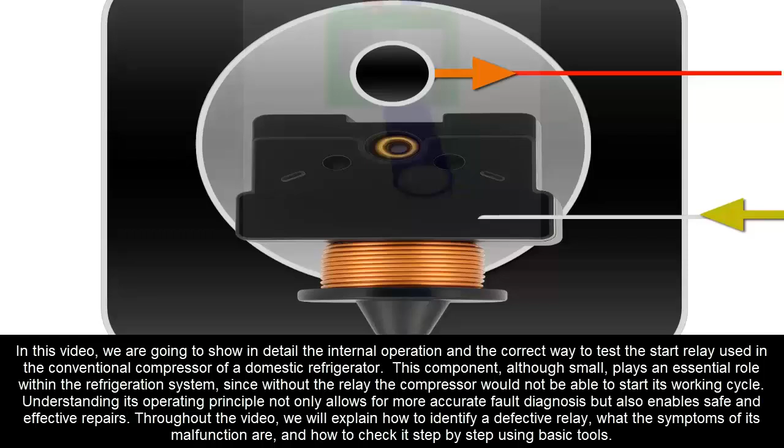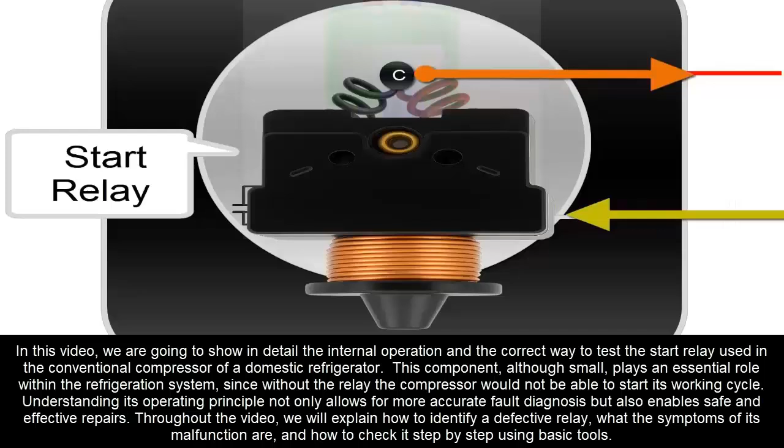In this video, we are going to show in detail the internal operation and the correct way to test the start relay used in the conventional compressor of a domestic refrigerator. This component, although small, plays an essential role within the refrigeration system, since without the relay, the compressor would not be able to start its working cycle.

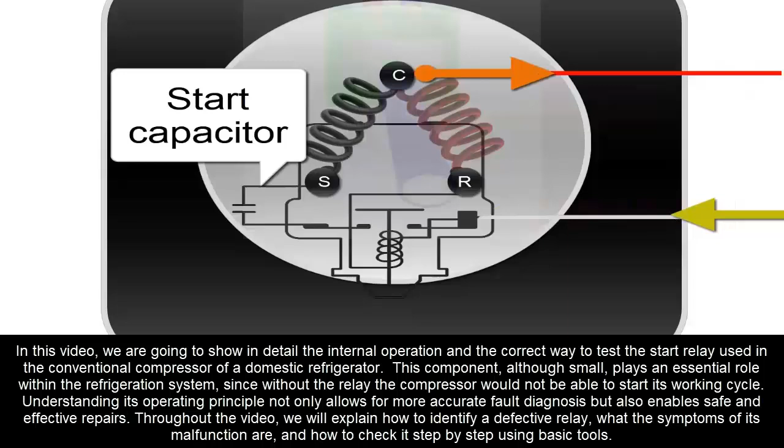Understanding its operating principle not only allows for more accurate fault diagnosis, but also enables safe and effective repairs. Throughout the video, we will explain how to identify a defective relay, what the symptoms of its malfunction are, and how to check it step by step using basic tools.

Function of the compressor relay. The compressor relay is a fundamental electrical component within the starting system. Its main task is to help the compressor motor start correctly by supplying the additional current needed during the first seconds of operation. Once the compressor has started, the relay automatically disconnects, leaving the circuit in normal operating conditions.

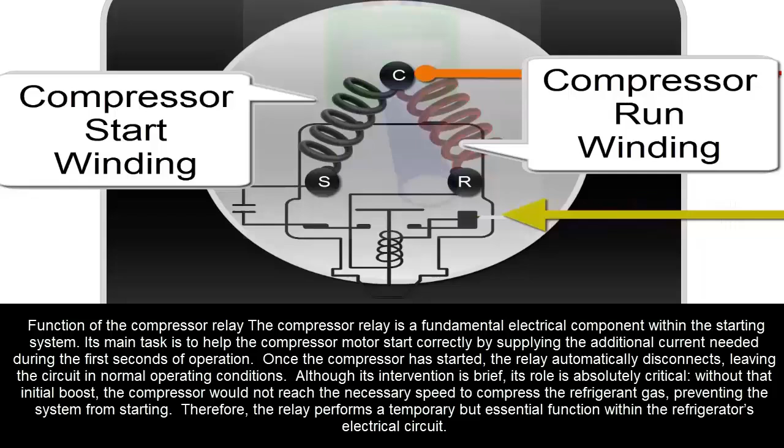Although its intervention is brief, its role is absolutely critical. Without that initial boost, the compressor would not reach the necessary speed to compress the refrigerant gas, preventing the system from starting. Therefore, the relay performs a temporary but essential function within the refrigerator's electrical circuit.

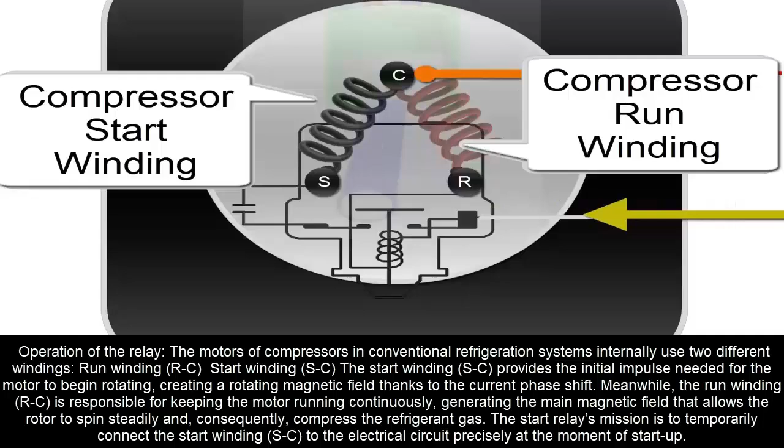Operation of the relay. The motors of compressors in conventional refrigeration systems internally use two different windings: run winding, RC, and start winding, SC. The start winding, SC, provides the initial impulse needed for the motor to begin rotating, creating a rotating magnetic field thanks to the current phase shift.

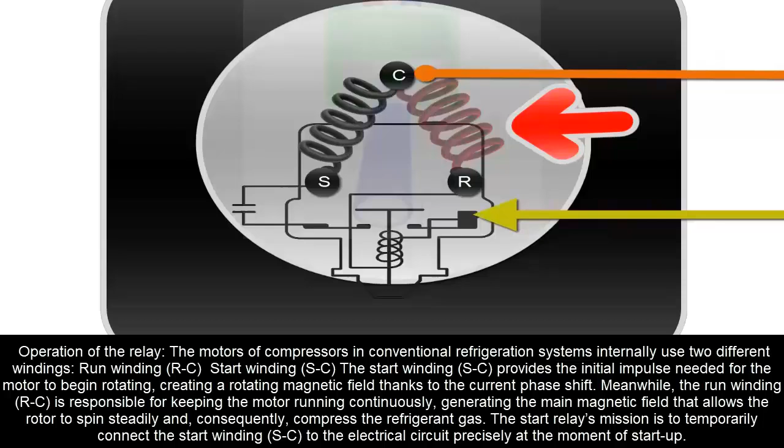Meanwhile, the run winding, RC, is responsible for keeping the motor running continuously, generating the main magnetic field that allows the rotor to spin steadily and consequently compress the refrigerant gas.

The start relay's mission is to temporarily connect the start winding SC to the electrical circuit precisely at the moment of startup. During this initial phase, the motor requires an additional surge of current to overcome the mechanical inertia of the rotor and the resistance of the refrigerant gas inside the system.

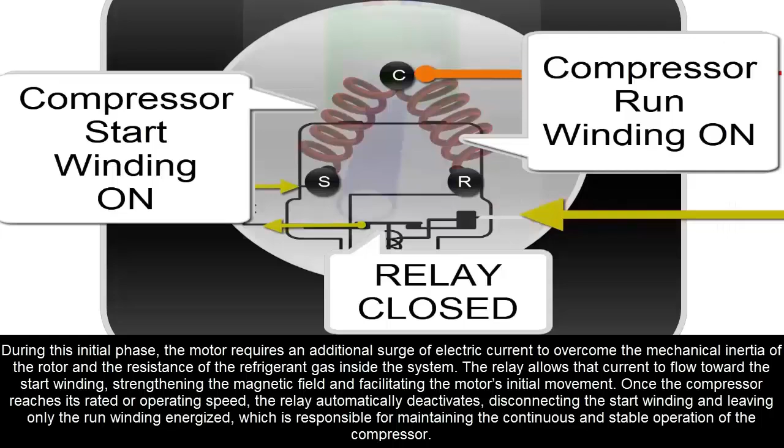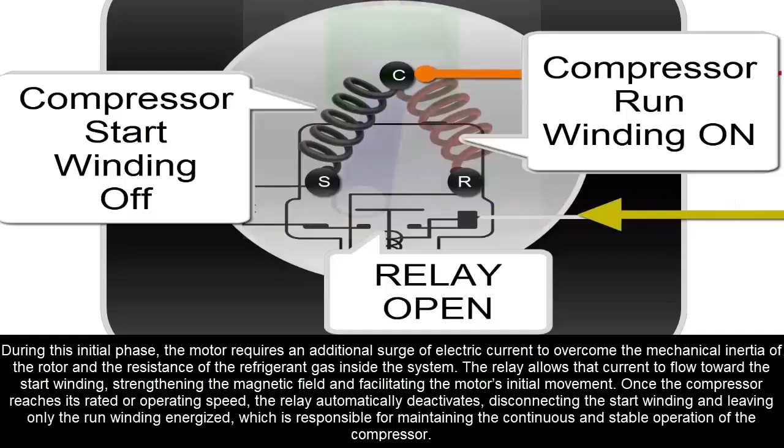The relay allows that current to flow toward the start winding, strengthening the magnetic field and facilitating the motor's initial movement. Once the compressor reaches its rated or operating speed, the relay automatically deactivates, disconnecting the start winding and leaving

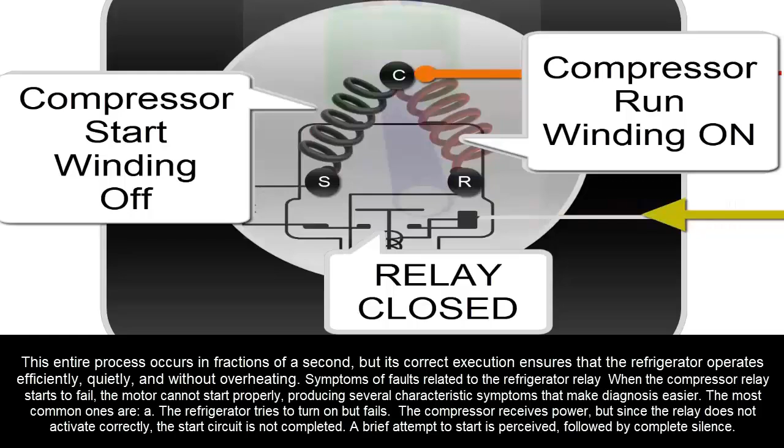only the run winding energized, which is responsible for maintaining the continuous and stable operation of the compressor. This entire process occurs in fractions of a second, but its correct execution ensures that the refrigerator operates efficiently, quietly, and without overheating. Symptoms of faults related to the refrigerator relay.

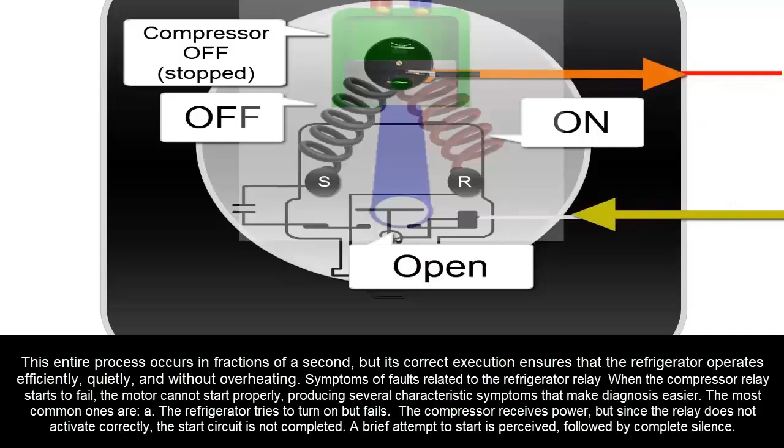When the compressor relay starts to fail, the motor cannot start properly, producing several characteristic symptoms that make diagnosis easier. The most common ones are: A. The refrigerator tries to turn on but fails. The compressor receives power, but since the relay does not activate correctly, the start circuit is not completed. A brief attempt to start is perceived, followed by complete silence.

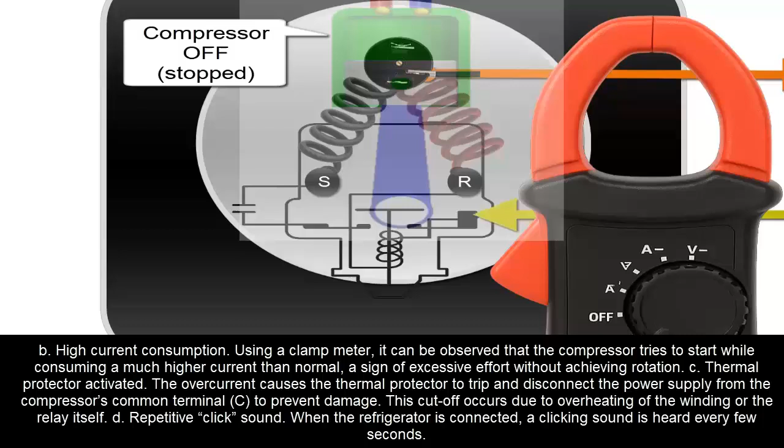B. High current consumption. Using a clamp meter, it can be observed that the compressor tries to start while consuming a much higher current than normal, a sign of excessive effort without achieving rotation.

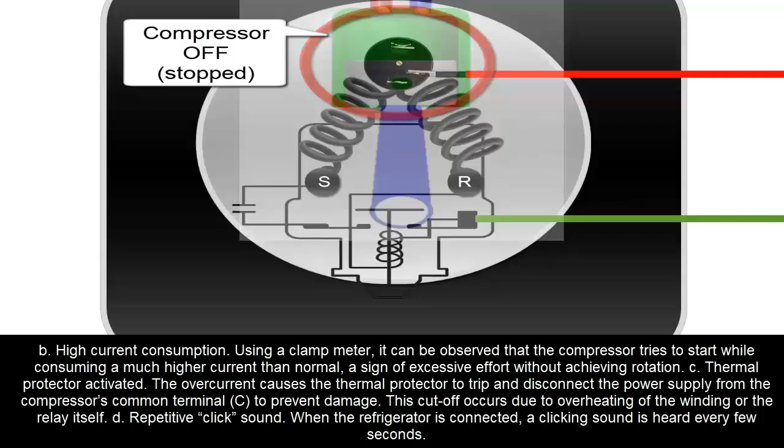C. Thermal protector activated. The overcurrent causes the thermal protector to trip and disconnect the power supply from the compressor's common terminal, C, to prevent damage. This cutoff occurs due to overheating of the winding or the relay itself.

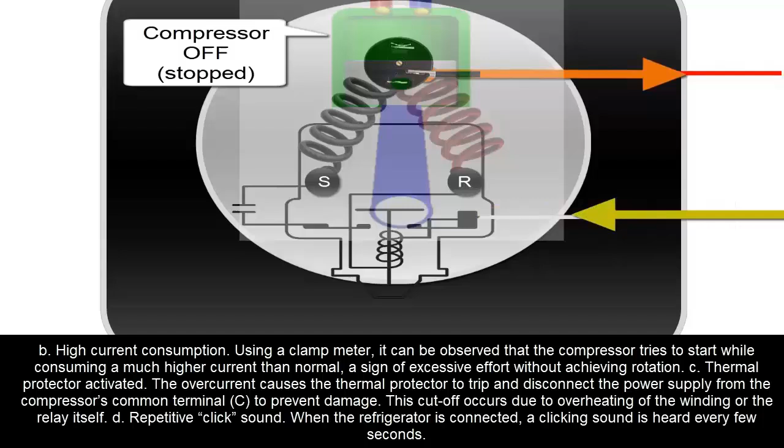D. Repetitive click sound. When the refrigerator is connected, a clicking sound is heard every few seconds. This sound comes from the thermal protector opening and closing the circuit in an attempt to protect the compressor when the relay fails to connect the start winding.

E. Hot compressor without running. The compressor heats up from repeatedly trying to start without success. Without receiving the start boost, the motor remains static, generating excessive heat until the thermal protector shuts it down.

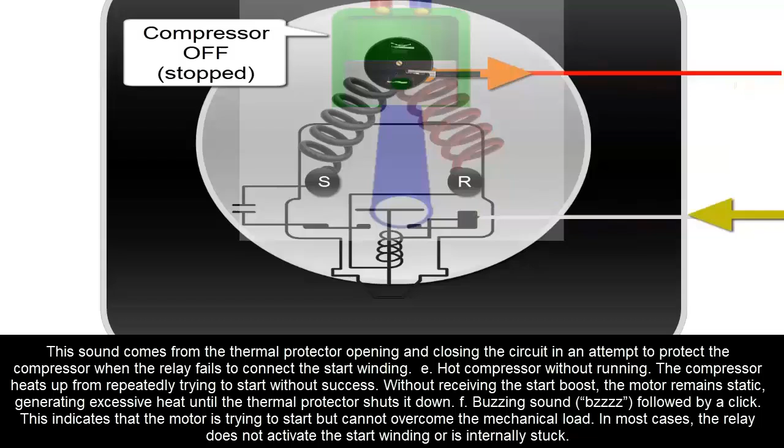F. Buzzing sound, followed by a click. This indicates that the motor is trying to start but cannot overcome the mechanical load. In most cases, the relay does not activate the start winding or is internally stuck.

G. The refrigerator does not cool, but the fan and light work. There is general electrical power, but the compressor does not start. This is a classic symptom of a defective relay or an interrupted start circuit.

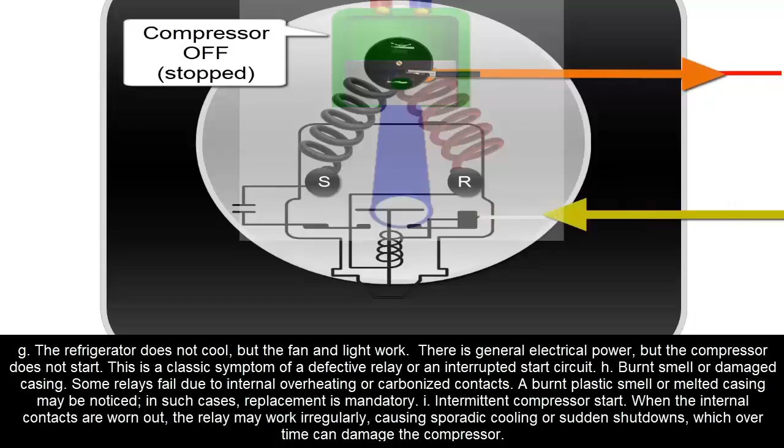H. Burnt smell or damaged casing. Some relays fail due to internal overheating or carbonized contacts. A burned plastic smell or melted casing may be noticed, in which case replacement is mandatory.

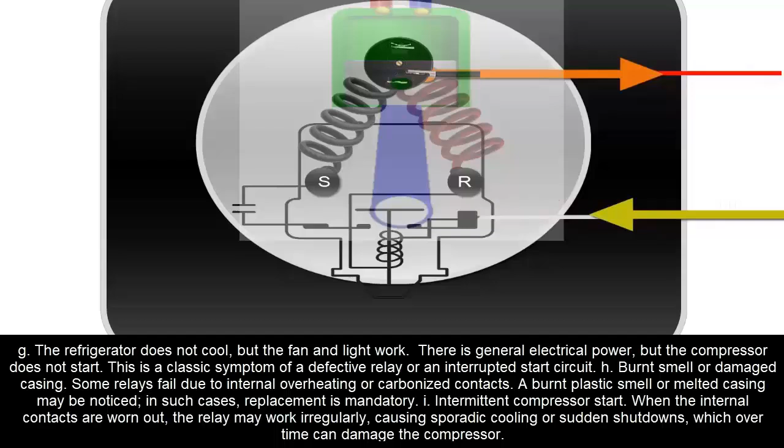I. Intermittent compressor start. When the internal contacts are worn out, the relay may work irregularly, causing sporadic cooling or sudden shutdowns, which over time can damage the compressor.

How to test the compressor start relay. The most reliable method to check the condition of the start relay is to perform a manual start test and verify if the compressor operates correctly. The procedure is as follows.

A. Disconnect the refrigerator from the power supply. Take a photo of the connections to make reassembly later easier. If the compressor uses a start capacitor, discharge it with an insulated metal object or preferably with a resistor, since it retains charge even when the appliance is unplugged.

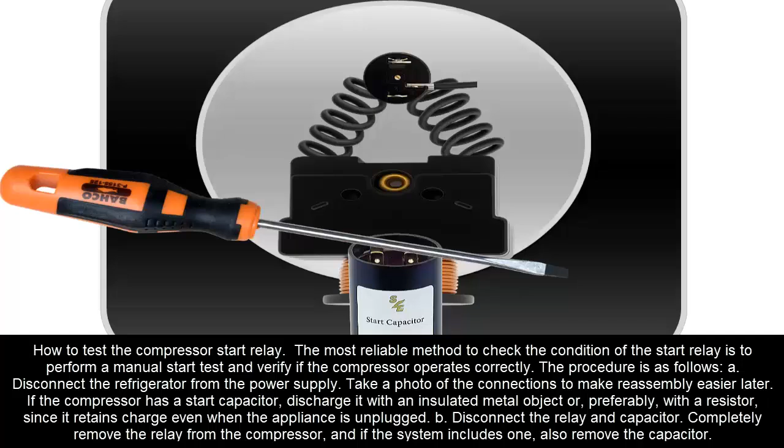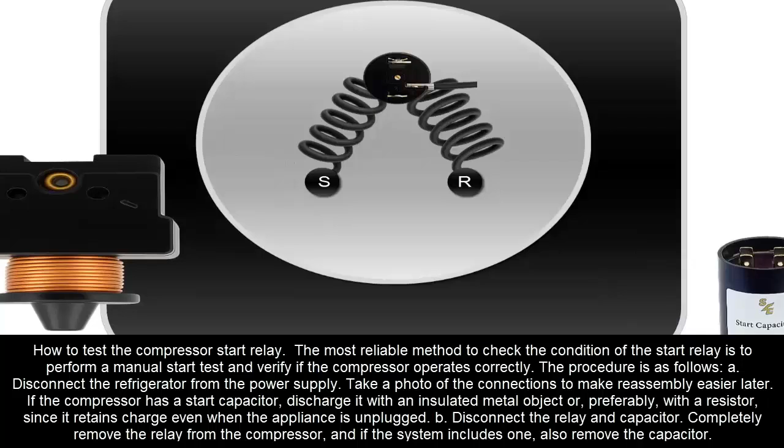B. Disconnect the relay and capacitor. Completely remove the relay from the compressor and, if the system includes one, remove the capacitor also.

C. Locate the thermal protector. This device is usually connected to the compressor's C terminal, and its function is to protect the motor from overheating and overcurrent. Disconnect the system wire from the thermal protector.

D. Prepare the test wires. The compressor has 3 terminals, C, R, and S. To power the compressor directly, 2 wires are needed. Wire number 1, not energized, must be connected to the thermal protector. Wire number 2 must be prepared with a jumper, creating 2 ends, called A and B.

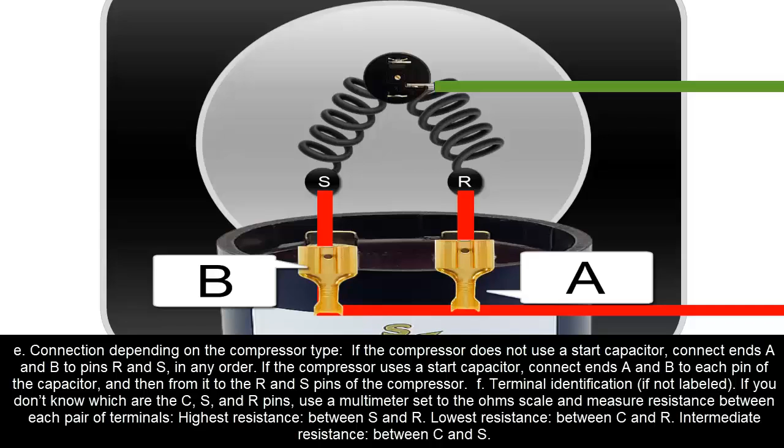Connection depending on the compressor type. If the compressor does not use a start capacitor, connect ends A and B to pins R and S in any order. If the compressor uses a start capacitor, connect ends A and B to each pin of the capacitor and then from it to the R and S pins of the compressor.

F. Terminal identification if not labeled. If you don't know which are the C, S, and R pins, use a multimeter set to the ohm scale and measure resistance between each pair.

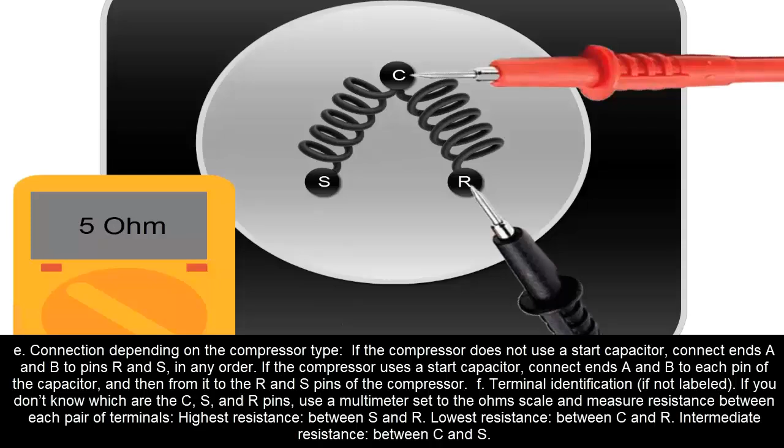The highest resistance is between S and R. Lowest resistance is between C and R. Intermediate resistance is between C and S.

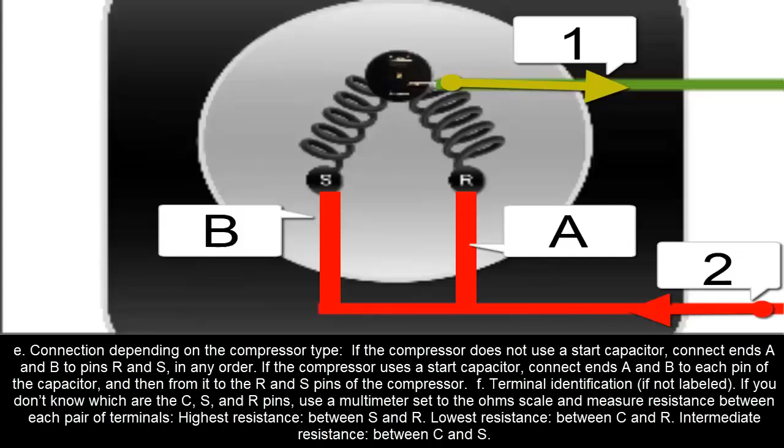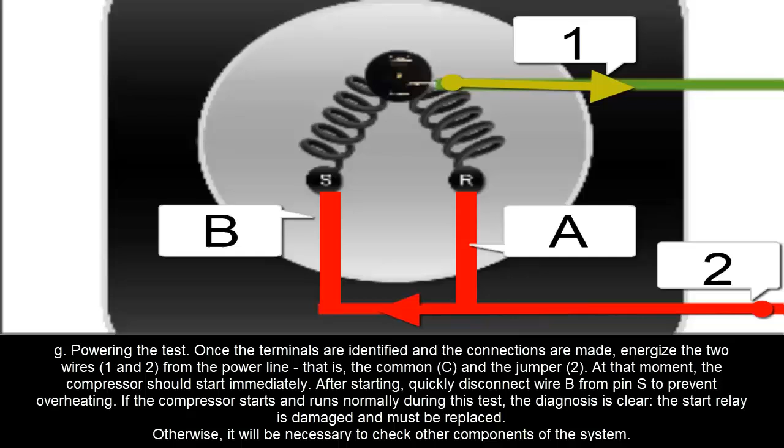G. Powering the test. Once the terminals are identified and the connections are made, energize the 2 wires, 1 and 2, from the power line. That is, the common, C, and the jumper, 2.

At that moment, the compressor should start immediately. After starting, quickly disconnect wire B from pin S to prevent overheating.

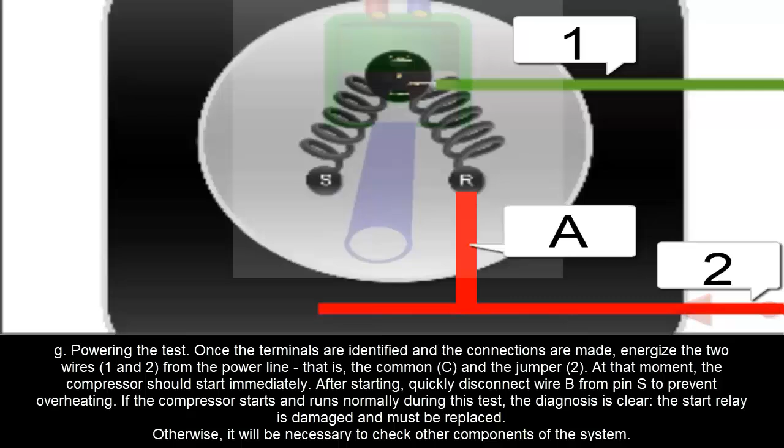If the compressor starts and runs normally during this test, the diagnosis is clear. The start relay is damaged and must be replaced. Otherwise, it will be necessary to check other components of the system.